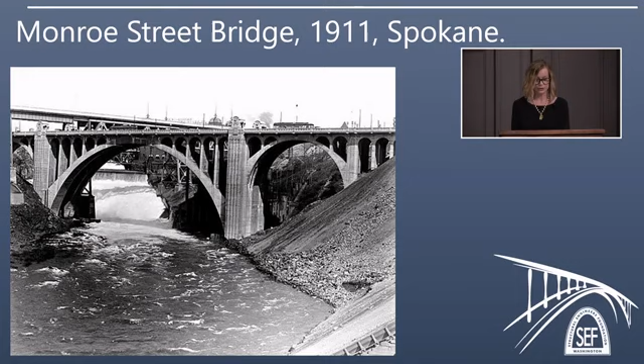And it's probably the reason that we had earlier concrete bridges here is that Washington doesn't have a big steel tradition, but we did have a thriving Portland cement industry. So we did have an early bridge, and that bridge is a historic bridge. It has been completely rebuilt in 2005, but retains the original arch span.

Now, another type of bridge, those two were both high fixed bridges, but we of course have movable bridges, drawbridges, and bascule bridges are the most common type. They are named bascule for the French word for teeter-totter, and that refers to the way that the movable spans are raised and lowered on counterweights. And if you've ever driven in a city over a river, you've probably driven over a bascule bridge.

Now, Seattle had a lot of desirable qualities as a place to build a city, but as I mentioned with the regrades, they had a lot of ambitious major engineering projects to do. And this South Lake Union area, that's where Amazon and tech companies are today. At this time, that was David Denny's lumber mill.

And back as early as the 1850s, one of the major engineering projects that they wanted to do was to cut a canal that would link Lake Washington at the east to Puget Sound to the west, and connect them by way of Lake Union in the middle.

And that is why it's called Lake Union, because it was going to be what united these two waterways. It got going in fits and starts by private investors, David Denny being one of them. Eventually the federal government took over the project, and this is how far the creek had been dug between Lake Union and Salmon Bay at the time the government got involved.

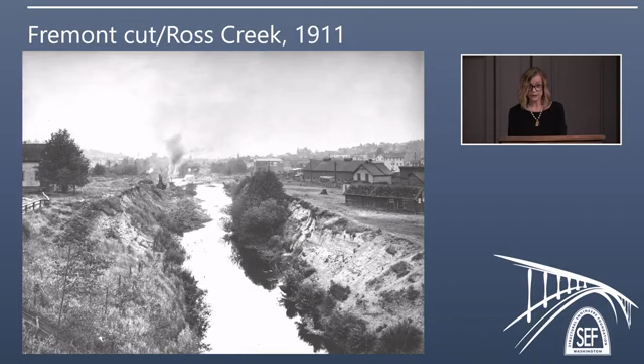They undertook the project, which included 2 waterway cuts, one at Montlake between Lake Washington and Lake Union, and another at Fremont. The city was responsible for 4 bridges. The Corps of Engineers were also building the locks and spillway, but the 4 bridges were up to the city to finance and build.

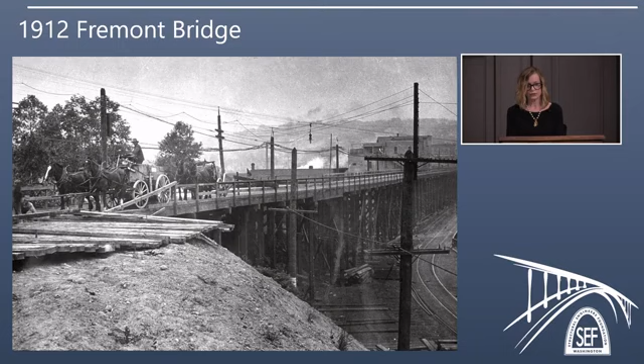The first, Fremont, there had been a bridge at this site since the 1890s that spanned the natural creek we just saw a photo of, which was the natural outlet of Lake Union. This bridge was built - this is actually the second bridge, not the 1890 bridge. This was built longer to accommodate the canal being dug.

In 1911, there was a temporary bridge built at Stoneway, which you could see in the distance beyond the bridge under construction here. It was temporary, but people got so used to using it, they wanted to keep it. They asked the federal government to permit another crossing there, but they said nope, so it had to go. Unfortunately, no crossing there.

So 9 months after the completion of the locks, the first bridge was finished, the Fremont Bridge. And then the Ballard Bridge is the next one. This is the Salmon Bay Bridge.

There had been a crossing at this same spot at 14th Avenue West since the 1890s. This one was built in 1910, temporary, with a swing span to allow for the construction of the locks. There is still evidence of this bridge. If you're familiar with Seattle, if you drive around Ballard, you'll see on 14th Avenue West where it's wider and there's a gravel parking strip down the center. That's where this bridge came out and that carried the train tracks. So that's why it's like that.

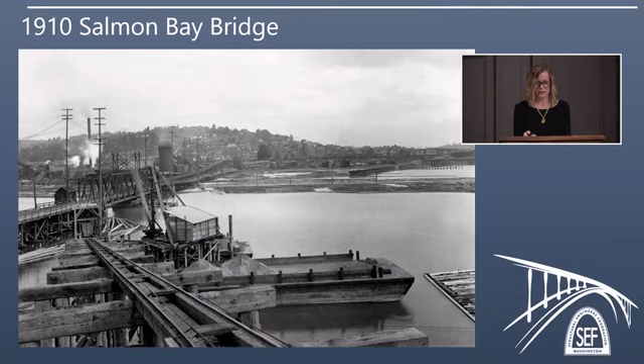Progress. However, for the University Bridge, there was a 2-year delay before it would be done. Part of that was controversy over the location.

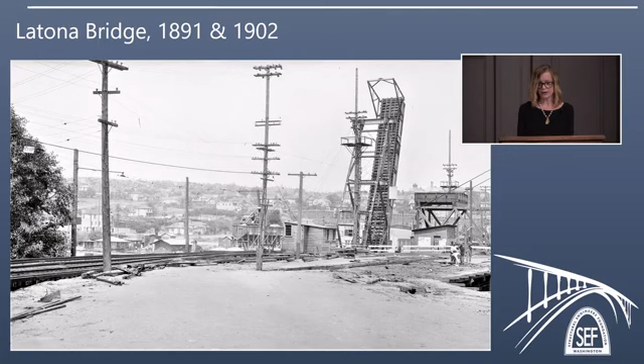This originally replaced the Latona Bridge, which was at 6th Avenue Northeast, and that served an area called Brooklyn, which we now just call the University District, and the University of Washington to the east. People wanted a bridge that would get them closer to the university. So funding was rejected until they decided on a site at 10th Avenue Northeast, which is where the University Bridge opened in 1919, but that was a costly delay.

They had to renegotiate contracts at wartime prices during World War I. So this bridge came in at $825,000, which was more than what the first 2 bridges cost combined. So it was a costly delay.

And all of the bridges had creosote timber on the decking, which became rather slippery when wet, which is quite often in Seattle. This bridge was particularly dangerous. It averaged 6 deaths a year because of the slippery conditions. This grating completely eliminated any deaths due to those conditions, and it was put on all the rest of the bascules by the end of the 1930s.

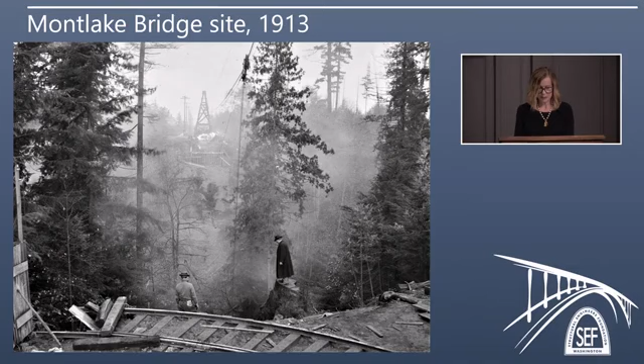It would be another 6 years before the 4th and final bascule bridge was built. Ironically, its foundation piers had been in place since 1914, because the Montlake Cut between Lake Washington and Lake Union cut Montlake Avenue, and they built the piers at the time. So people who wanted to cross at Montlake would have to take a 5 mile detour, taking one of the bridges to come back up. It was very inconvenient, and the area east of the university that it served was growing rapidly.

So why, in 1919 and 1920, did the citizens deny funding? Well, class resentment is probably the biggest reason, and that may sound cliche or intellectually lazy, but in 1919 the first citywide general strike in the nation was held in Seattle. So the tension between the working class and the moneyed class, and people who lived in these fine homes, was very real. And so they had to get creative.

The University Stadium had just been built in 1920, so bridge boosters teamed up with influential Husky fans and promoted it as the Montlake Stadium Bridge. It didn't pass, and a couple more times didn't work either, but finally on the 8th try, with momentum building for this stadium bridge, it passed in 1924.

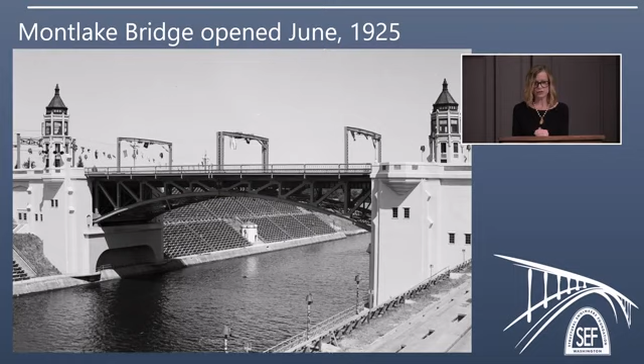And with the completion of that bridge came the completion of a long dream to build the Lake Washington Ship Canal. And John will now talk about bascules.

Thank you, Maureen. That's a fascinating description of how we tried to cross that waterway from Lake Washington down to the lock, to Lake Union, because clearly that's a big impediment and you need bridges to get over it. I'd like to turn the page a little bit and look inside some of these bascule bridges, and just see how they're built and how they work and what's important to them.

There's a few things which are relevant. One is that they've got lots of moving parts, so in some sense they're like a machine rather than just a fixed bridge. The spans you can use are also fairly limited by the machinery you put inside to lift and lower them. As Maureen pointed out, you do need to balance the weight, with a counterweight at the back and the span in the front. And of course, the lighter you can make the whole thing, the better off you are, because then the less energy you need to use in all the machinery.

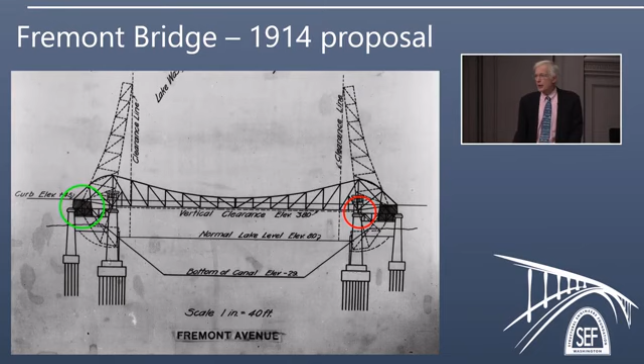This is a picture of the original Fremont Bridge proposal, and you can see it in both the up position and the down position. A couple things to point out: where the red circle is, that's the pivot point — essentially the balance point of the teeter-totter as it goes up and down. Another is the counterweight, shown by the green circle on the left. You can see that the backspan, the distance from the counterweight to the pivot point, is really quite short. You don't have much choice in that, because that point has to go down underground, and if you made it really long, you'd have to dig an enormous hole to accommodate it. So with a short backspan, you need a heavy weight on the back, and those weights are actually pretty big.

If we go to the Fremont Bridge and look at it as built, we can see some of those same features. There's a line there saying axis of rotation, which indicates where the pivot point is that it swings up and down on. You can't really see it from here because it's hidden behind the concrete sidewall, but that's where it is. And on the front, we've got these two steel supports where the bridge comes down and sits on the concrete, so that when it's in the down position, the weight is supported on the front, which stops the whole thing from tipping over forwards into the water.

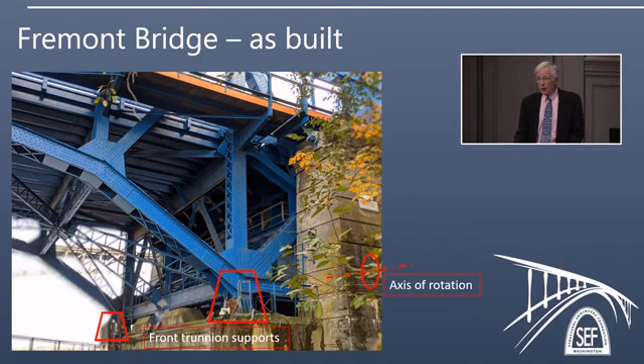How do they make them? Well, there was a fairly thriving shipbuilding industry in Seattle at the time, and to build ships you need big machinery, and that, I suspect, is part of the reason why we are able to produce these very large machine parts. You can't readily see inside, but if you drive over the bridge, you can still see the drive track. If you walk across on the pedestrian side, on the west side, you can see these big greasy drive tracks there, and they are indeed the working guts of the bridge.

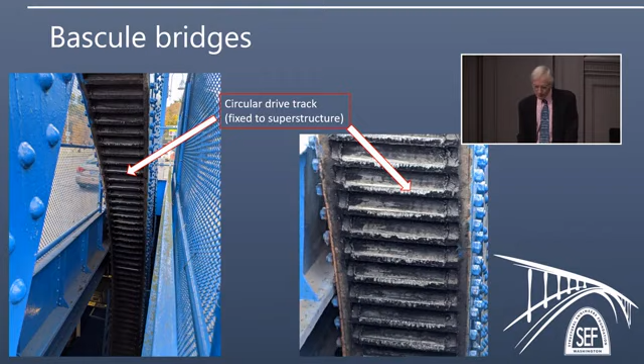I think we should take a look at the steel bridge construction in the Bascule era and just see how they made these things. And some of the important technology, when you make a bridge, is that you have to make it in pieces. You cannot just make a whole bridge and drop it in place suddenly. If you make it in pieces, you have to connect them together. And the way you connected them together at the time was using things called gusset plates and rivets, and we'll see those here.

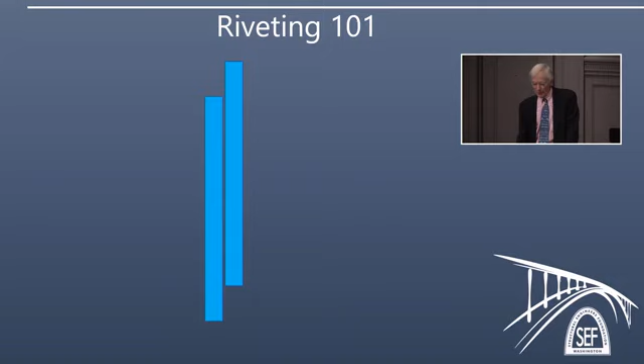If you've got two plates, maybe two gusset plates, that are sitting next to each other and you want to connect them, the first thing you do is drill a hole. Then you heat up a rivet to red heat, cherry heat, and then you put it in the hole. Then you bring up a riveting tool, which is a thing like a big heavy hammer which sits behind it on the head side. You bring up another riveting tool on the opposite side, and then you whack it so that you form a second head on the rivet when it's still hot. At that point, you're sort of done.

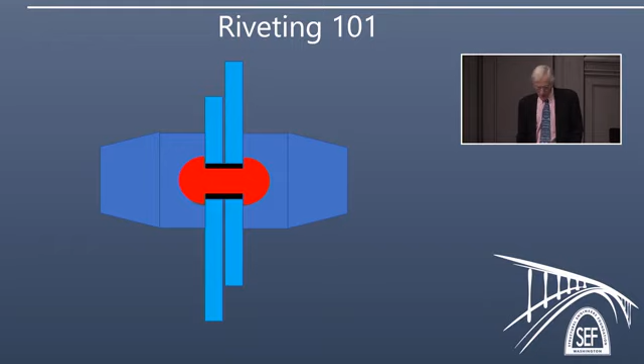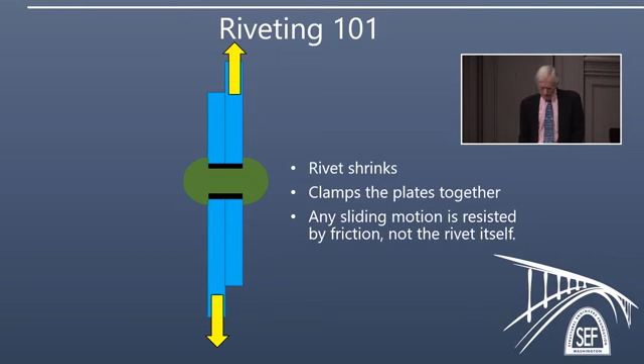I think it would be useful to look and see how it's done in practice. So there's a couple of pictures here I took from Peter Stackpole's wonderful book about building the San Francisco Bay Bridge, and these images are from him.

This is another picture just to give you an idea of how dangerous this work was. In the previous picture, you could see they didn't wear any form of ear protection, and riveting was a very, very noisy business. Up here, you can also see they are riveting on the very top of one of the towers of that San Francisco Bay Bridge, because the big piece of metal on the left is a cable saddle where the big suspension cables are going to go over.

You can see there's another gas burner up there smoking away. You don't see a single safety line anywhere. And these guys are something like 300 feet above the water. So tragically, it's not surprising that several people died on most of these big bridges.

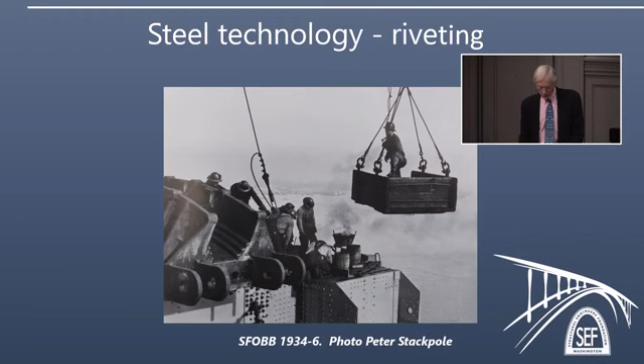And the answer is, if you don't have a pin, if the soil were to move, then you'd induce some stresses in the steel that you probably don't want. If you put the pin in there, then it allows the steel to move and you don't get any stresses in it. So it's a great way of dealing with either temperature effects or potential soil movement.

So how have things changed today? Well, back then we did riveting. Riveting took something like a 4 or a 5-man team to put in each individual rivet. And that in today's terms is incredibly expensive in terms of labor.

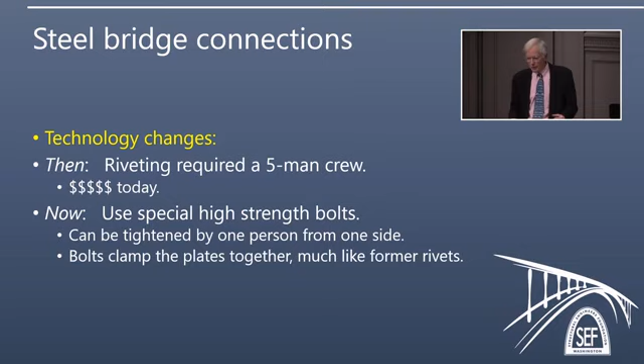So since then, what we've done is switched over to very high strength bolts, which do the same kind of job as the rivets. They clamp the plates together in a very similar way, but in today's world, there are now bolting systems that you can put the bolt in and tighten it up just from one side. You may wonder if you've got a nut and a bolt head, how do you do that? But that's another story that we won't go into today.

Well, if we think about the kind of overall steel bridge design and not just the connections, then there's a few things that stand out. If you're making steel bridges, steel is pretty strong stuff. Therefore, you don't really need very much of it. If you don't need much of it, then the members get to be quite small and skinny. And if you make them quite small and skinny, then immediately you bump into the problem of buckling. So what we find in steel structures is that two of the big problems are, number one, buckling, and number two, the connections. How do you connect the pieces together?

Second thing is, because it's so strong, you really need to put the material only where you need it. And that's why we wind up with configurations like trusses, which seem to have an awful lot of air in them, which is quite true. But you put the steel just exactly where you need it and nowhere else, and that's how you get that configuration. And the last thing is, how do you put these things together?

Well, back then, they put them together in what we would call a stick-built fashion. You bring each individual piece and you rivet it together. Today, it's a more common practice to weld together bigger pieces, to take those bigger pieces out to the site and then to bolt them together. Because welding is well suited to work in a well-controlled shop where you've got good weather. Bolting is better in the outside world where welding is pretty expensive, and particularly crane time is expensive. You don't want to have a crane holding onto a piece for a whole day while you weld it together.

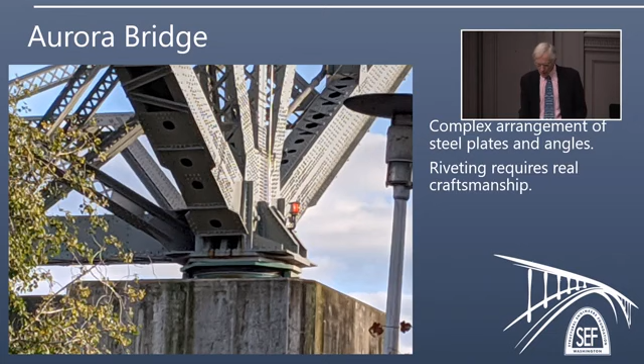There's one more thing here. I'm sure some of you have seen down the bottom, there's some more modern-looking green plates. These are seismic isolation bearings, which were put in in 2011. What they do is allow the bridge to move around a little bit on the support. The bearing is kind of like a saucer-shaped cooking pot with Teflon on the inside. It allows the foot of the bridge to slide around inside that giant saucer-shaped cooking pot so that it can displace a bit, and that massively reduces the forces on the bridge due to earthquakes.

I think you can imagine that putting that thing in retroactively meant that somehow you had to pick up the bridge with one hand and then put the bearing under with the other hand and then quietly let the bridge down on it when you were all finished. So just from a construction point of view, that was a remarkable operation.

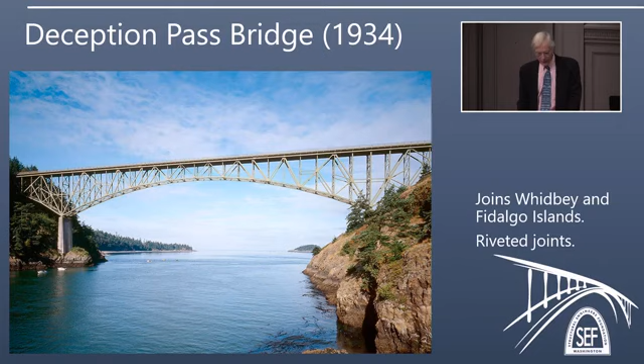A couple of other bridges here. Deception Pass, the same kind of era in the 1930s, again built by the cantilever method. And this is a particularly difficult one because the currents under that bridge are wicked as the water flows in and out due to the tides. So if you fell off that bridge, then it was probably a bad outcome.

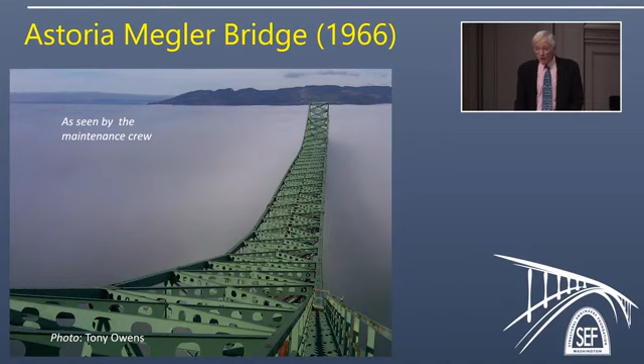So what do you do if you want to make an even longer bridge over water? Well, I think we'll hand over to Maureen to answer that question.

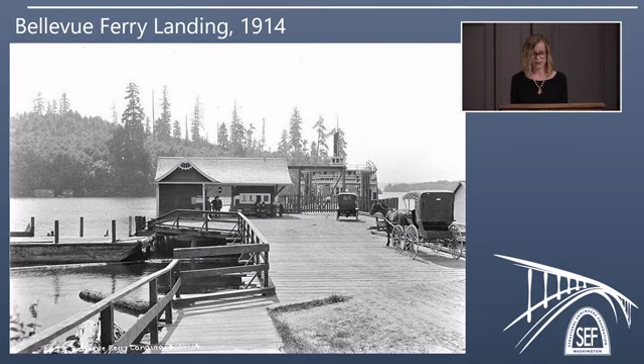And here is a horseless carriage followed by a horse and carriage waiting to get on the Bellevue ferry. If you did have a car, you could drive to Seattle, but you had to take a 26-mile, 1-hour trip around the south end of the lake and back up north to the city. There was no vehicle access to Mercer Island. And the area of Bellevue and Mercer Island were very, very rural.

After World War I, Mercer Island was considered a prospect for residential development if only you could get a car there. So they built the East Channel Bridge connecting the northeast side of the island to Bellevue. This is the same area where the I-90 connects today. This did increase the residential population a bit in the 1920s, and there was some interest among islanders for a bridge across the lake to Seattle.

But it was problematic. The lake's very deep, muddy bottom, so a traditional bridge on piers is problematic, and there just wasn't enough interest.

This gentleman, Homer Hadley, though, he was way ahead of them. He first proposed the idea in the 1920s. He was an engineer who had experience building concrete ships and barges in Philadelphia during World War I. So he was very keenly aware and interested in the floating possibilities of concrete.

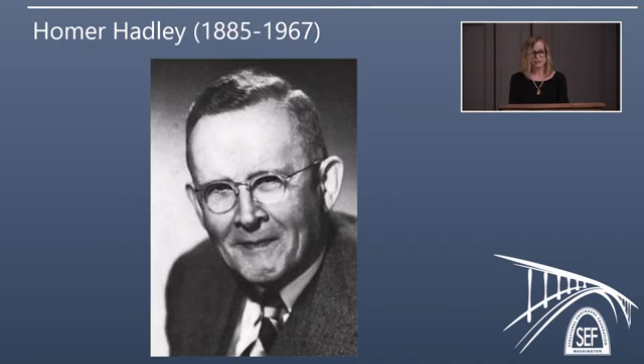The WPA offer was set to expire by the end of 1938. They proposed a tunnel through Mount Baker, but people didn't want it. There was a NIMBY problem, and debate over the location. The federal government said, enough already, build it, or we're going to revoke funding. So they broke ground two days before the end of 1938, just in time.

But Murrow asked Hadley to stay out of the public limelight of the bridge because of the Portland Cement Association, which would see it as a conflict of interest. He said, you'll get credit later after it's built, just keep quiet for now.

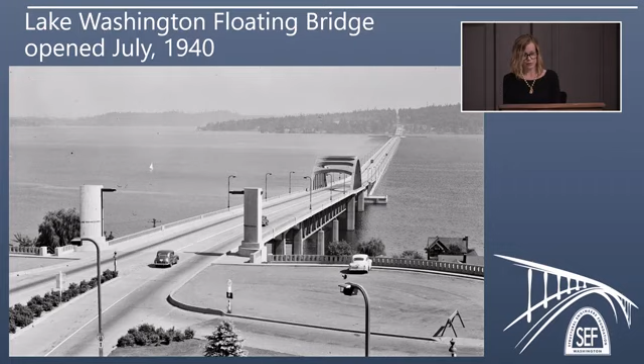It opened in July 1940. Its floating span was 6,620 feet. It was the longest floating structure in the world when built, and the first floating bridge made of reinforced concrete. It cut travel time from one hour to seven minutes from the east side to Seattle.

It was a resounding success. The bridge became an attraction in itself. People would come just to drive over the bridge, but it also sparked a massive amount of growth on the east side, particularly after the war. Between 1940 and 1950, the population and property value at Mercer Island increased 300%.

The growth was really concentrated in Bellevue and Mercer Island. By 1948, Kirkland, further north, wanted another floating bridge to serve their community. But it would be another 15 years before it was built.

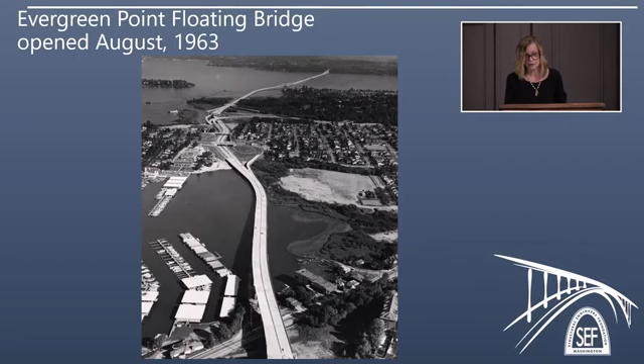It did deliver the growth they had hoped for. It paid its toll off even sooner than expected, 21 years early. It was supposed to be paid off by 2000, but it was paid off by 1979. But the traffic relief it was supposed to have created was totally erased by the population growth.

So in 1989, a third floating bridge was constructed directly adjacent to the first one.

After that third bridge was in place, they went about refurbishing the original bridge at 50 years old. They were refurbishing the pontoons and left these pontoon hatches open over a Thanksgiving weekend in 1990, and it happened to be a very blustery one. A storm came in, and those open hatches got filled with water. Workers attempted to pump the water out, but it was too late. One pontoon sunk, and then they all went down like dominoes.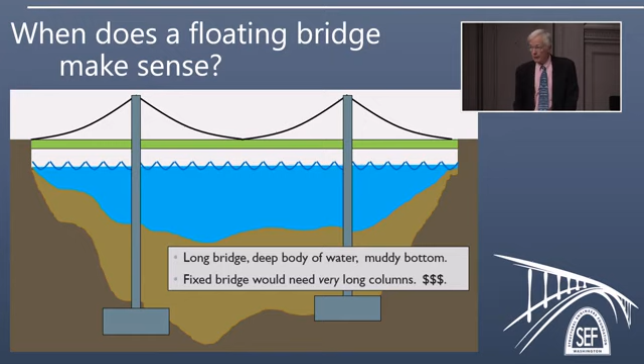You might be suspicious and say, I don't think concrete floats. Do these things really float properly? Well, if you put enough air inside it, you can make anything float, and that's exactly the principle used with concrete pontoons. We use it for ships too. Steel ships have been around since the middle of the 19th century, and they float, even though steel's heavier than concrete. So why make it out of concrete rather than steel like a ship? Basically because the concrete solution is cheaper.

We've also had significant experience with these things. Homer Hadley himself was doing it during the World War I era. A good reason for making ships out of concrete then was that they were non-magnetic, and people were running around with magnetic mines, clamping them onto steel ships and blowing them up. Of course, you can't do that with a concrete one.

We make things like LNG, liquefied natural gas barges - giant floating platforms. Docks the same. And even the UW-ASCE has a concrete canoe team, making concrete canoes which they paddle and race. Those things are incredibly light and thin.

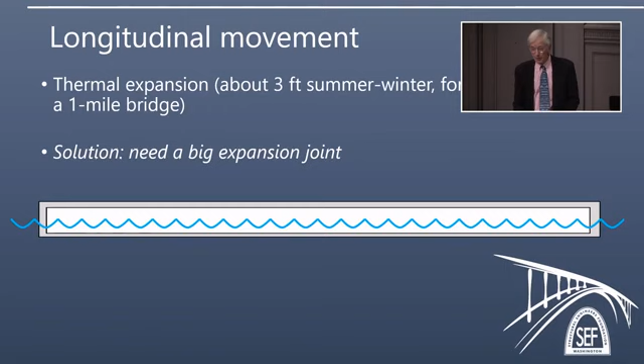Transversely, across it, what do we do there? The problem is that if you don't anchor it down properly, the bridge might blow away or be carried away by the tide or current. In Hood Canal it's tides, and in Lake Washington it's mostly winds. There are a couple of floating bridges in Norway, usually at the mouth of a fjord, where a river comes down, so in that case it would be the river current you have to anchor them against.

So we put in anchor cables, which are fairly flat, nearly horizontal. At the far end, there are a couple of different types of anchor you can use. One is what we call a gravity anchor - crudely, just a big bucket full of rocks, very big with a lot of rocks in it. That works nicely if it's sitting on competent soil. If the soil is very soft, the bucket of rocks would sink into the soil and move around. So typically there you'd use a blade anchor, more like the anchor of a ship - it cuts into the soil and then picks up a lot of weight of soil.

So this is a gravity anchor. This one's actually out at the Hood Canal, and you can see this is the bucket, and they're just dropping it between two giant barges and a big gantry crane, just dropping it into the water where they want to, and then they drop the rocks in later.

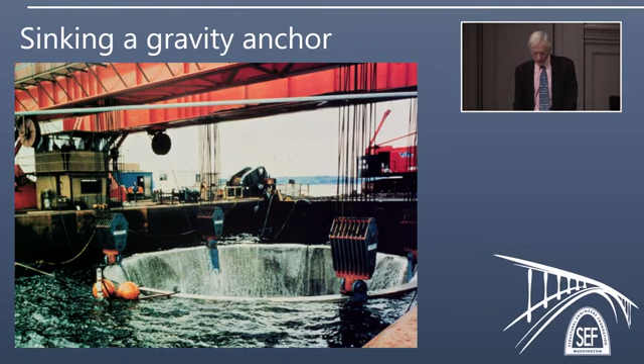This is a blade anchor being constructed, and you can see there's a steel triangular shaped thing which is a clevis with a little hole at the front end, which is where the cable will be attached using a shackle. At the back end, it looks like there's a wall going to be constructed of reinforced concrete because you can see the rebars there. That is the flat part of the blade, which will engage a lot of soil, so when you pull on the anchor, it won't go anywhere.

At the other end of the anchor, inside the pontoon, you need to fix it there, but you also need to make some space for adjustment. So what you have here is a long red track, and there's a movable dolly in the middle of it, with the end of the cable attached to that dolly by a clevis. If you want to move it, you undo the bolts which are holding the dolly to the track, put a big jack in behind it, pump up the jack, move it to where you want it, and put bolts in the new place.

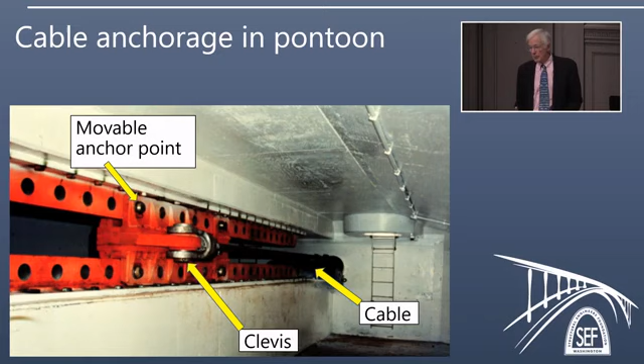In that way, you can adjust the length of the cable and the tightness of the cable. And the last movement you might be worried about is vertical. How do we deal with that if you've got these anchor cables there? Surely they would hold the bridge down and sink it if the tide moved up too far.

If we look at the vertical change in water level, in the lake it's not too bad, it's around about 2 feet, and this is adjusted by the Corps of Engineers by messing with the lock height. In Hood Canal, the tide is something like 12 feet from top to bottom, so that's a much more serious problem.

But in both cases, what you can do is if the tide goes up, if you make the anchor cables flat enough, then the change in length of the anchor cable is actually very small as the tide goes up or the current goes up.

So what happens to these bridges? Well, unfortunately, we've lost 2. When I came to the state of Washington, there were 3 floating bridges here, and since I've been here, 2 of them have sunk. I assure you those 2 events are not related, I had nothing to do with their sinking. The Lacey V. Murrow Bridge went down, as Angela pointed out, as Maureen pointed out, in a big storm on Thanksgiving Day. There was actually a perfect storm of events that happened then.

As they were trying to retrofit the bridge, they were cutting some of the deck off using hydrodemolition, where you use very high pressure water jets to cut the concrete. That meant the water was contaminated, so they were forced to store it somewhere and then pump it away later. So they were storing it in the bridge, because where better? It's a giant box which you can put stuff into. So they were putting it in the bridge and pumping it out every 3 days or whatever, and it happened to be fairly full at the time that the Thanksgiving weekend came up.

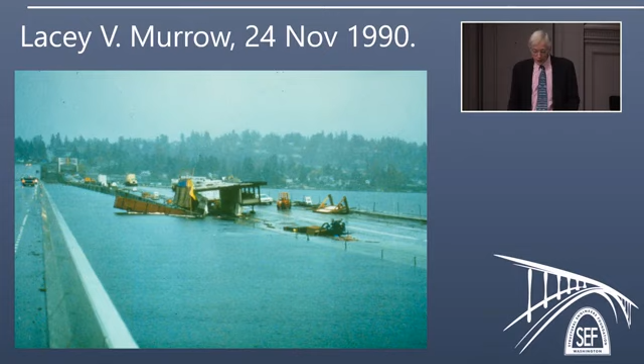In addition to that, the cable hatches were open on the side, and a giant storm came up over the Thanksgiving weekend when there were very few workers around to do anything about it. And so the rest is history.

The second bridge that went down was the Hood Canal. This went down in February 1979 in a particularly heavy storm. What happened there was that there were hatches on top of the pontoons for access so you could get inside to inspect them. Those hatch covers blew open as the water was washing over the pontoons, and as they blew open, the water got into the pontoons. You know what happens if you fill a concrete box with water when it's meant to be floating. So with this bridge too, we lost half of it.

Those are the kind of ordinary problems that you have to deal with if you own a floating bridge. There are some special problems which come up, which we can look at, just a couple of them now.

One of them is that in a floating bridge, it will move up and down with the water level. That means you've got to get from the fixed part of the bridge, which is on land, to the floating part, which is going up and down. This is exactly the same problem you have in a harbor when you have to get from ship to shore. You need a gangplank.

You'll get rotations at each end of the gangplank as the water level goes up and down. We can see that here as the water goes down, the gangplank has to rotate.

This is fine if you've got rubber-tired vehicles. They can deal with that little sharp kink at the end because it really is not that sharp. You don't even notice it as you drive across. However, if you have aspirations to put light rail over the floating bridge, then the picture changes because you have fixed rails, and rails do not like to go through these sharp angle changes. So you need some device in order to smooth out this sharp angle change into a gentle curve.

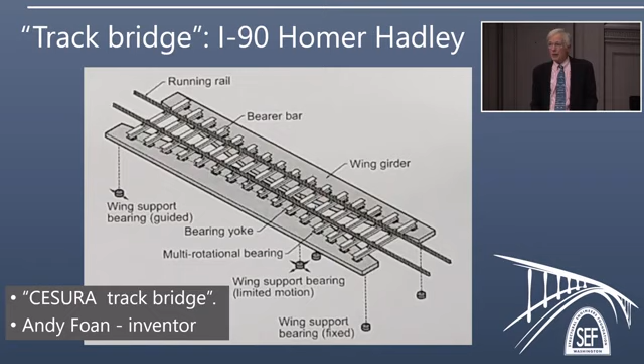The geometry is worked out in such a way that the vertical curve is exactly right, so the rails will be tangent to the slope of the rails on the other part at the end, and you get a smooth curve instead of a sharp rotation point. When you first look at it, it's mind-bogglingly complicated, and when you've seen it a few times, you think, my gosh, that's clever, because it's simple, and it really is.

This is the one they're installing right now on the I-90 floating bridge, and it's not a super good photograph, but you can see the cross pieces are the railroad ties or the bearer bars. You can see that they are slightly different lengths, and you can see that they're built on a curve, and the support bearings underneath them, and you see the rails on top of them.

As far as I know, this is the only one that has ever been built in the world, and so by definition, it's the first time this system has been used anywhere.

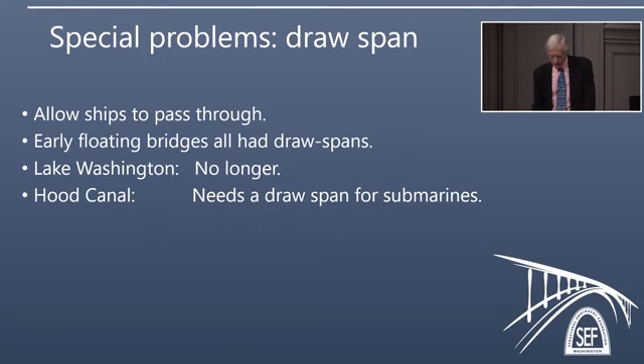Another problem you have when you own a floating bridge is that you probably need to let ships through, and this involves a draw span. And all of the early floating bridges had a draw span in them to let ships through. This is no longer true in Lake Washington, but the Hood Canal still maintains one, and we can take a look at a couple of them here.

Now this involved a somewhat awkward driveway, especially if you were drunk, because you'd be coming along going straight on the floating bridge, and suddenly you'd have to go through this rather sharp bend as you move from the original straight line out to a straight line that was 20, 30 feet further out. And so there was a certain danger to motorists here.

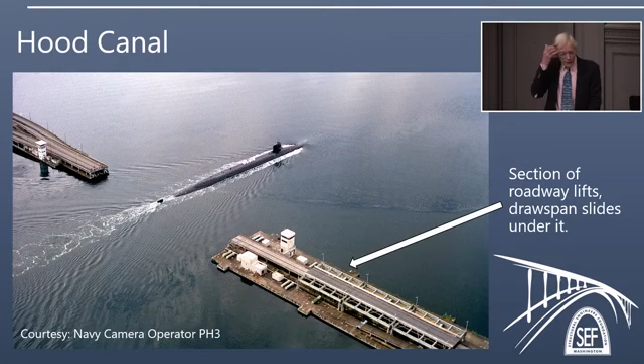What they've done there is, instead of having an opening where you simply float between two side pieces, they actually lift up the roadway on hydraulic jacks, and the part which is moving to make the opening slides underneath the part which has been lifted up. So it's kind of an over and under system rather than a side-by-side system.

So I think you now know everything about floating bridges, so we should move on and look at another different type of bridge, and that's pre-stressed concrete bridges. And these are very, very common in the state of Washington. They're actually common over the whole country now, and they're really the workhorse bridge for medium-span bridges in the kind of 75 to 225 foot range.

These pre-stressed girders seem to do a wonderful job because they're economical, they're very durable, you really don't need to do much to maintain them, and therefore they have very low life cycle costs. And this is the main reason why they've become so widely used across the country. They were started in 1952, and we're still using many of them today, and they pretty much started in the state of Washington.

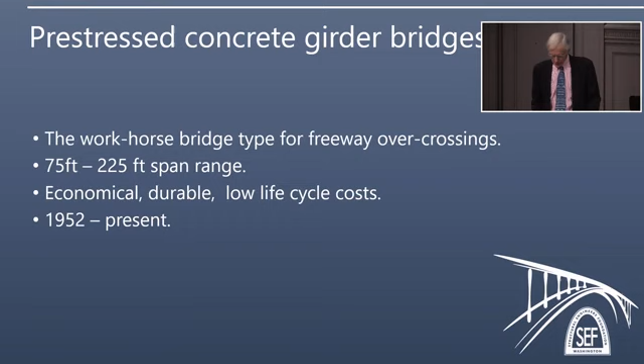For those of you wondering what pre-stressed concrete is, let's just try and put the course into 30 seconds here. If you have a regular reinforced concrete member, like a beam, and you load it with some gravity load, you drive a truck across it, then the beam will bend, and on the tension side, which is the bottom, the concrete will crack. Now, that is not remotely unsafe, because you have already put steel reinforcement in there to carry any tension forces, so from a safety point of view, it's just fine.

But on the other hand, when the concrete cracks, it does two things that you don't really want. One of them is that if the concrete cracks, the member becomes a lot more flexible and the deflections become bigger, and that may become a problem. The second is that with cracks, water and de-icing salts and other nasty chemicals might get into the cracks and eventually corrode the steel, and that would be a safety problem.

So what you can do is pre-stress it. And what you do is you put a cable through the concrete, and then you put a jack on it, and you pump up the jack, and you put a big stress in that cable. You then come along and put an anchor at the end where the jack was, and then you can throw the jack away. And what you're left with is some concrete which is pre-compressed by having this tension cable through it.

If you imagine, it's a little bit like having a bunch of kids' blocks with a rubber band which is stretched tightly around them. They're squeezed together and the rubber band is in tension, and so far you've got no load on it. Now the good thing about this is that it delays the onset of cracking very significantly, and that massively changes the performance of the material. And again, it's one of these ideas like Andy Foan's CESURA. It's really clever because it's really simple.

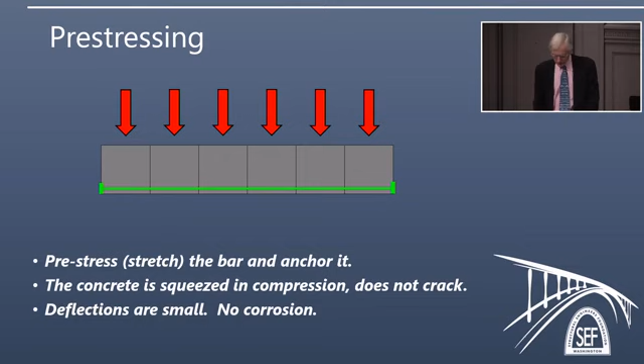Now, like all these people, Art was, I think the way to describe him is a highly intelligent, visionary knucklehead, because he was the kind of person who, if you wanted him to do something, all he had to do was say, Art, you know, I don't think this could be done. And he'd kind of grit his teeth and he'd go off and he'd do it. Whether you thought it was possible or not, he would make it happen. He was that kind of a guy.

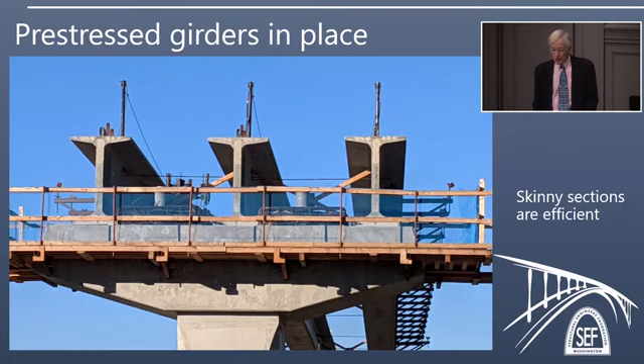What they then do is they put the form together around these cables, cast the concrete. When the concrete has set up and hardened, they let go with the jacks. The cables try to shorten, but because they are now bonded to the concrete, which surrounds them, they can only shorten a very small amount, and the whole thing comes to equilibrium with the concrete in a lot of compression and the cables still with a lot of tension in them.

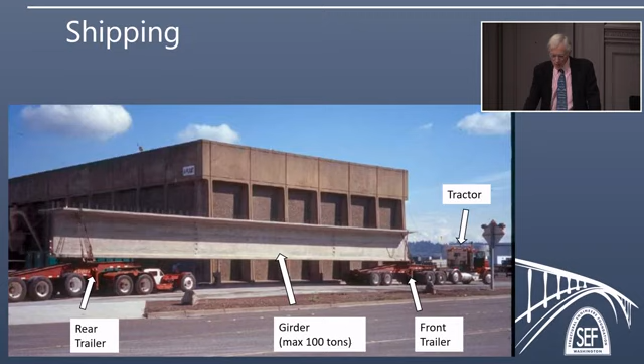And each of those trailers has a lot of wheels anyway, just because the weight is so big that you have to spread the weight over an awful lot of tires so that you don't overload any of the roadways or bridges that you're crossing. And then the girder simply spans between the front and the rear trailer, carrying its own weight, because it's perfectly capable of doing that. You put a tractor on the front and off you go.

But there's one more thing here. In the back, you may or may not have noticed, at the front of the rear trailer, there's a little cab, and you can just see it's got a kind of a white part on the cab there. This is necessary because you need to steer that rear trailer. So someone sits in that cab. They don't have any power available. That all comes from the tractor in the front. But they sit in the trailer, and they have to steer that trailer.

And they are barreling along the highway at 60 miles an hour, and they've got a concrete girder weighing something like 100 tons about 2 feet above their head. And frankly, rather them than me, and I hope they get paid a lot of money for doing that, because it seems like a very dangerous and skillful job.

Then when you get to the site, you take them off the truck, off this trailer system, quite carefully, and then you simply erect them on the bridge. And in that sense, they're a bit like a steel girder, in that you can simply put it straight up there. You don't need any wet concrete there. You just put the girder straight up.

You do see some things that look like bits of orange rusty metal on the side. These are brackets which will hold the formwork, because on top of these girders, they will eventually cast a field cast concrete slab, because this is again the Sound Transit up at Northgate. They need a flat slab to put the rails on. So that's what will happen. That's what those brackets are for.

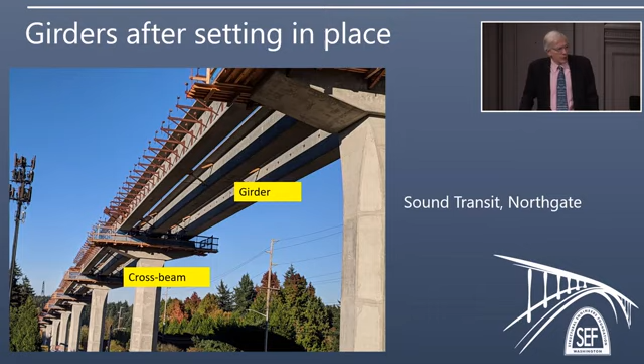So I think that's probably quite enough about prestressed concrete. And we should move on and talk about another type of bridge, which Maureen will introduce you to, which is the Pasco-Kennewick Bridge.

Pasco-Kennewick, yes, thank you, is two of the three cities that make up the area we call Tri-Cities, the third being Richland. Pasco and Kennewick are across the Columbia River from each other. Now, they are still largely farming communities, but Pasco got a Northern Pacific rail yard in the late 1880s, and that bridge you see back there is the Northern Pacific Railway Bridge.

But until 1922, the only way to get people or automobiles across was by a 6-car capacity ferry. Getting a lot of people across was very difficult. In fact, the Pasco-Kennewick football teams, when they'd have their big rivalry game, the visiting team would charter a train to get everybody across.

In 1922, they built the first Pasco-Kennewick Bridge, called the Green Bridge. It is a 2-lane steel truss cantilever bridge. And this was a cooperative effort between the two counties that the two cities are located in. And it was funded by communities all over the state because it was a really important major crossing in the early highway system of the state. It closed the gap in State Route 397, which was also known as the Inland Empire Highway.

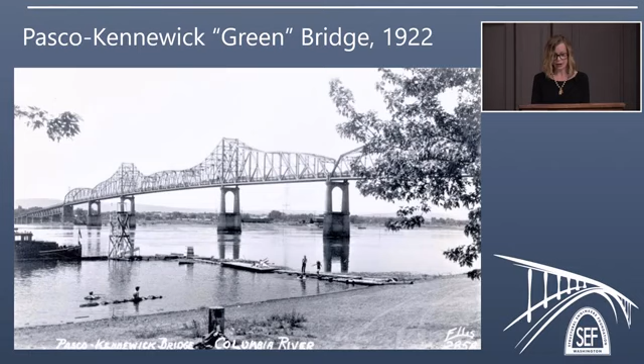You can see here it crosses where the ferry route was, and in fact there is a grounded ferry over there on the side, on the right. And it served both communities very well, until about 1940, when the construction for McNary Dam and the Hanford Nuclear Facility really started creating a population boom and a traffic boom, and the old 2-lane bridge became very congested and dangerous. They'd even treat it as a one-way bridge at times because it was so narrow. They'd let a car pass and then another car pass, and so it could be quite a mess.

So in 1954, it was time to bust out the novelty scissors again for the opening of the second Pasco-Kennewick Bridge. It was built about a mile upriver, and it connected U.S. Highway 395. It did, however, divert traffic away from the city centers of Pasco and Kennewick.

The Pioneer Memorial Bridge, which is nicknamed the Blue Bridge for the color of its steel through truss there, is a 4-lane arch truss bridge. It was the first steel tied arch design in the state. And it definitely improved conditions for driving, but it did decrease traffic into the cities of Pasco and Kennewick.

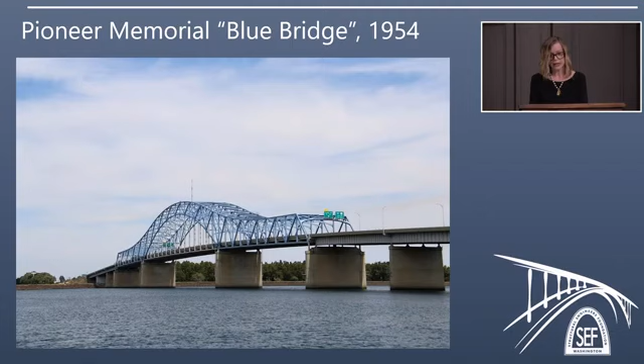So a gentleman named Ed Hendler, who would later become mayor, was actively trying to get the old bridge, the green bridge, fixed up, or even have another bridge built next to it, to try to bring people back into their community. However, there was just no funding to be found for it.

And then in 1967, the Silver Bridge collapsed over the Ohio River, killing 46 people. And the federal government started the National Bridge Replacement Program. So the federal government would pay for 75% for a new bridge.

And Hendler, as I mentioned, wanted to do a second 2-lane bridge next to the 1922 bridge. But the Army Corps of Engineers said that its 13 piers in the water were too much of a hindrance for navigation. They wanted a 4-lane bridge with only 2 piers in the center lane of navigational traffic.

So then came this gentleman, Arvid Grant. He was a Latvian-born engineer who came to the United States and settled in Olympia in 1951. He had experience in Europe with post-war cable-stayed bridge construction, which was used to replace bombed-out bridges, and he wanted to bring this technology to the United States. This was the opportunity of a lifetime to cross a mighty river like the Columbia, as he put it, a once-in-a-lifetime dream for an engineer. His proposal fit the requirements of the Corps of Engineers, and its cost was comparable to other more traditional United States solutions to long-span bridges.

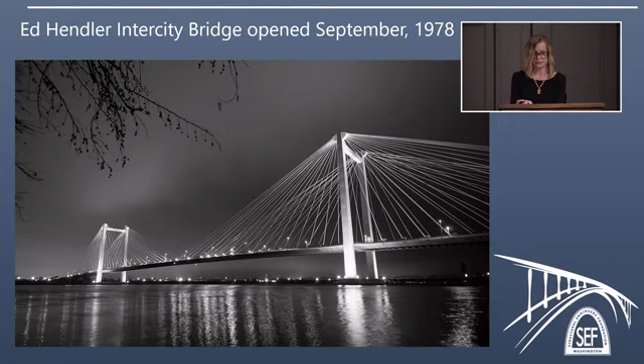And to explain how they work, I'll hand it over to John.

Well, thank you, Maureen. It's a very handsome bridge. If we take a very quick jog back into history, the idea of a cable-stayed bridge is not new. A gentleman called Fausto Veranzio built one in Venice, but clearly not out of high-strength steel cables, way back in the 16th century. A few were built at different times in different variations during the 18th, 19th, and early 20th century, but they really got a boost, as Maureen was pointing out, after World War II.

There were three conditions that came together at that time. One was that pretty much all the bridges over the River Rhine had been bombed out by the Allies during World War II, so they desperately needed bridges rebuilt. The second was that there wasn't much steel around because it had all been used in the war effort. And the third was that there were a lot of ex-Luftwaffe engineers who no longer had jobs because the Luftwaffe had been disbanded by the Allies.

So what you had was people with slick engineering skills and a real need for bridges, but very little material. So what do you do? You make a bridge which uses very little material and solves the problem. And that's exactly what happened. The two big movers and shakers here were a gentleman called Franz Dischinger and Fritz Leonhardt, the Franz and Fritz of the German bridge builders of the time. They were the ones who really developed the system in Germany shortly after the war. And as Maureen pointed out, it was Arvid Grant who brought it to this country for the first one in 1978.

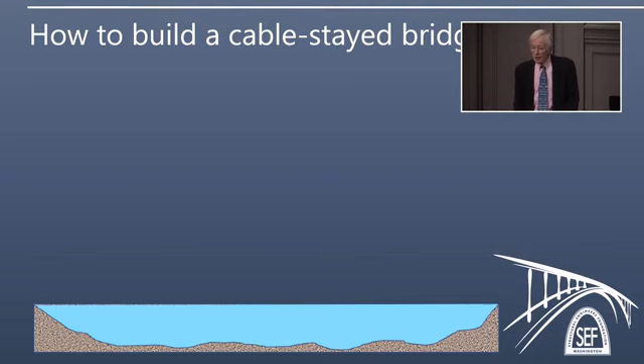So you start with the Columbia River, and you come and put a column down in it, or two as the case may be. You then put a cable down, and then you build a short piece of deck. You can either build it prefabricated and float it in on a barge, which is a common way of doing it, or you can do something else. Then you do the same on the other side, and you balance the weight on the column. Then you do the same on the first side, and the same on the second side, and you get bored of doing it individually, and you put them all up. So basically, you're putting a cable and a section of deck in, one after the other.

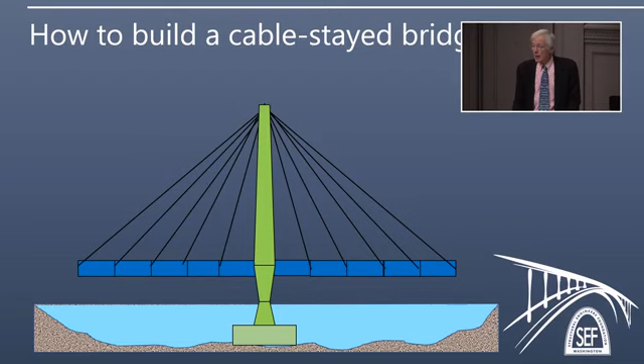You may be familiar with the Port Mann Bridge, just behind Vancouver, BC. That was built in exactly this way. It's one of the bigger ones.

What do the forces look like? It's a fairly simple arrangement. You have tension in the cables, not surprisingly. You have vertical compression in the tower, since that's the way all the weight is eventually coming down. What you get, which you don't particularly want, is a lot of compression in the deck. This is kind of the price you pay for having the tension in the cables.

The deck is typically made as light as you can make it, because you don't want to have cables heavier than you have to. Today a deck is often supported on steel beams, or in this case trusses which go transversely across it, with a concrete deck cast on top. This is done to make the pieces modular, so you can bring them in on a barge — say 20 or 25 feet of deck in a big piece — lift it up on a crane from the barge, anchor it to a cable, and go off to get the next piece.

The bad news is that you have compression in the deck, and this actually gets bigger the closer you get to the tower, because all the horizontal components of the cable forces are adding up. By the time you get back to the tower, there are some quite big horizontal forces in the deck. We're trying to make the deck light and as skimpy as possible so it doesn't weigh too much, so you have to be careful about buckling and material failure questions — that's just one of the things you deal with when you design a cable-stayed bridge.

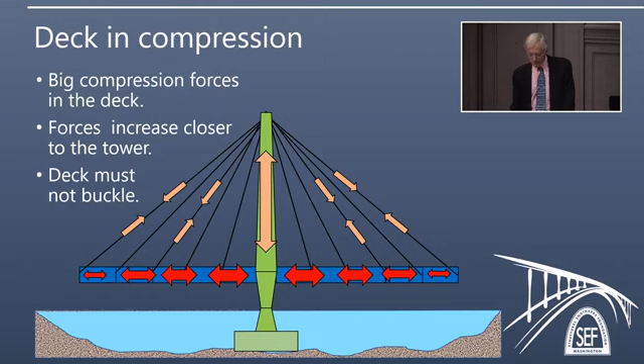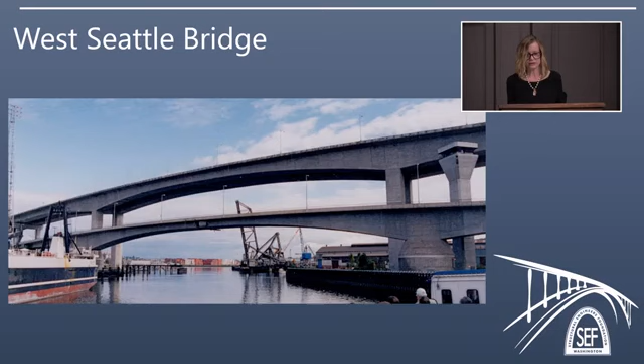Yes, the infamous West Seattle Bridge. There it is, and the Spokane Street Swing Bridge below it.

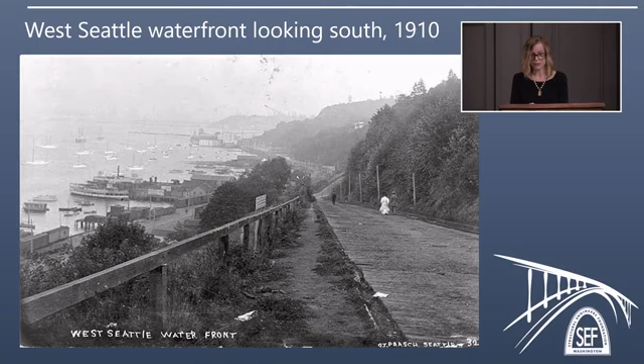Access was by steamer and ferry service until 1902, when the first low swing bridge was built at Spokane Street. A couple of years after annexation, the city built a new Spokane Street swing bridge.

Part of the main reason West Seattle voted to be annexed by Seattle was infrastructure concern — they wanted electricity and water. To save on cost, the city used pipes you can see on either side of the bridge to carry the water supply to West Seattle. Every time a boat came along and the bridge had to open, they would turn off the water supply and uncouple the pipes, so people in West Seattle couldn't turn on their water. It was a considerable nuisance that got worse as traffic and boat traffic increased.

By 1916, the community was calling for a high fixed bridge that would deliver residents and commuters up to the bluff where their homes were. But instead, in 1918, the city built a second, slightly higher bridge to be there on a temporary basis, just until they figured out what replacement they were going to put there.

This and the 1911 bridge handled the traffic pretty well. And in 1921, ferry service stopped. Growth was continuing, and traffic got very, very bad, so the calls for a high bridge were really reaching a fever pitch.

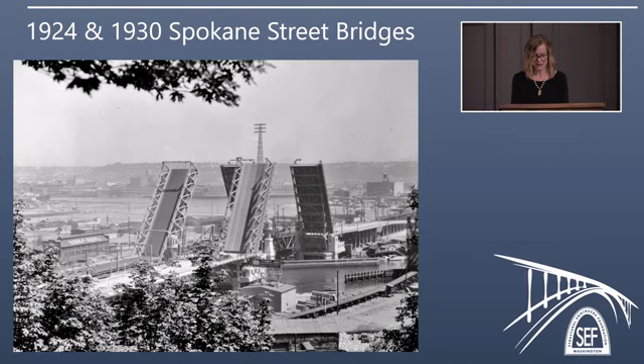Then an inebriated 80-year-old freighter pilot rammed into the north span with a freighter carrying 20,000 tons of gypsum, damaging it beyond repair. It was stuck in the open position, and because it was not fixable, it qualified for federal funding. So West Seattle was finally going to get its high bridge after over 60 years of asking for it.

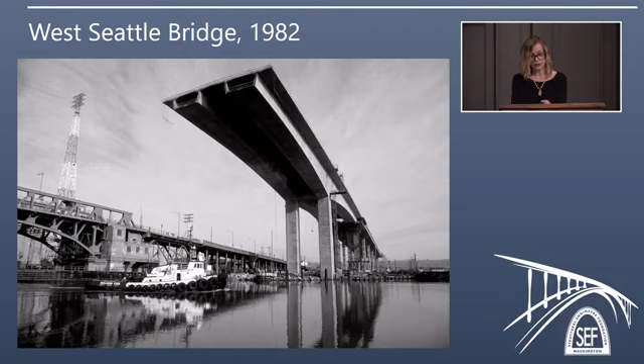So in 1980, construction began on a cantilevered segmental bridge. The 1924 bascule bridge was left in place and served the community while this bridge was under construction. A replacement for that lower bridge was part of the funding package, and that was completed in 1991.

So here they are together: the high bridge handles the commuter traffic, and the low bridge handles the industrial and port traffic. The low bridge is actually a pretty innovative bridge as well — it's the only concrete swing span in the world and the world's heaviest moving structure, and it was awarded an outstanding achievement by the Society of Civil Engineers.

But you have heard lately about the bridge giving us a bit of trouble, so I will hand it over to John to discuss that. Thank you, Maureen. I don't like to be the one who has to deal with trouble, but there we are. Let's go back to the good end of it.

When they were building the West Seattle Bridge, they were faced with the problem of building a bridge with a fairly long span — 590 feet for the main span, and about 375 each for the two side spans. They went with pre-stressed concrete construction. They actually had an option for steel or concrete, but the steel one came out to be quite a lot more expensive, so economics dominated and they built the concrete one.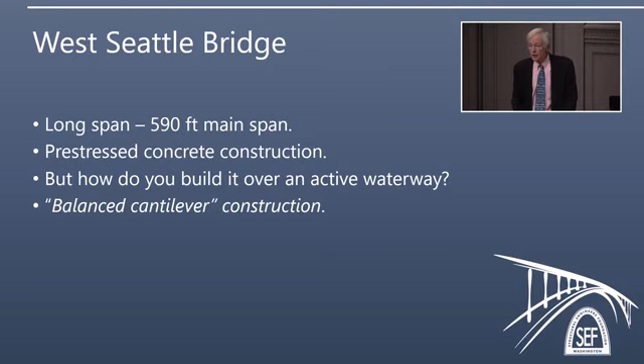Then again, the question is how do you build it over an open waterway when you cannot put false work down there? We're back to our old friend, cantilever construction — here it's called balanced cantilever construction, a slight variant on what you might otherwise have seen. It's a terrible name because at no stage is the construction actually balanced; it's always unbalanced, but we'll have to forgive the engineers for getting the wording wrong.

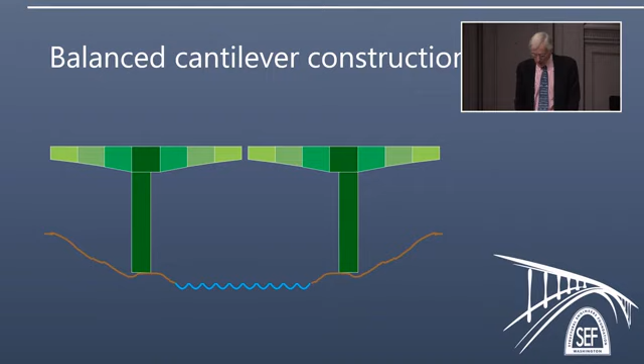What you do is build two big columns, about 12 feet by 17 feet square. Then you build a small portion of the deck structure, which is a big box, and push it out so it's a little bit eccentric — in this case, both pointing towards the middle. Then you build another one on the outside, making you about half a segment eccentric towards the outside, so now the columns are bending outwards. Then you put another on the inside, and now the columns are bending inwards. You keep putting pieces on the outside and the inside, always keeping the column very slightly unbalanced, because you really can't do anything else. Finally, you do what they call a closure pour in the middle, where you connect the two up.

Now, when you're building these things, you might ask, it's okay to show the pieces flying up in the air, but how do you stick them on? Well, the answer is you go back and do the same pre-stressing operation we saw before. When you put the piece on and you're holding it up with a crane, you put a cable through, anchor it at one end, put a jack on the other end, and pump up the jack tight to stress that cable. You come in and put an anchor on at the jack end, then drop the jack in the water and throw it away. What you're left with is all these pieces squeezed together by cables under high stress — again, think of the rubber band.

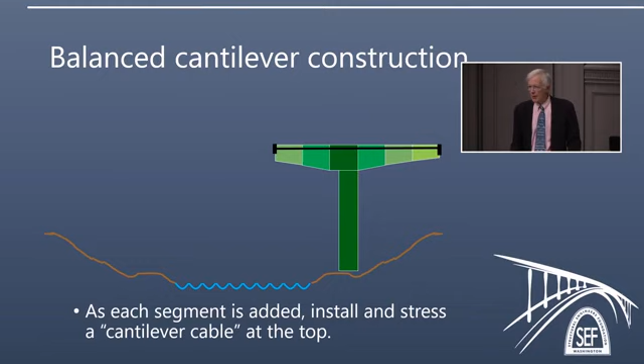You've got a super big rubber band on steroids, which is squeezing all of these pieces together, and that's how they manage to stay up. You do this on both sides.

In addition, when you've done the closure pour, you put additional cables in the bottom to take the weight when you drive trucks over this thing. So that's how you build a balanced cantilever bridge. You can actually do it two different ways: you can cast the pieces in place by putting a new form at the end, carried on a crane or false work, or you can ship them in on barges as prefabricated, precast pieces and lift them up with a crane.

Typically today, if you've got a big enough bridge and it's worth making a special casting yard, precast is probably the way to go because it's a little easier. But the West Seattle Bridge was built using cast-in-place technology.

Just a couple of drawings to show you what the drawings for these things look like. These are the drawings from the original bridge, and they're all hand-drawn. You can see the fairly elegant handwriting on there—these guys really took care with their handwriting.

This is the bridge in elevation. You see the big main span and the two side spans. The box thing in the middle is just a drawing showing the navigation clearance that was required by the Coast Guard.

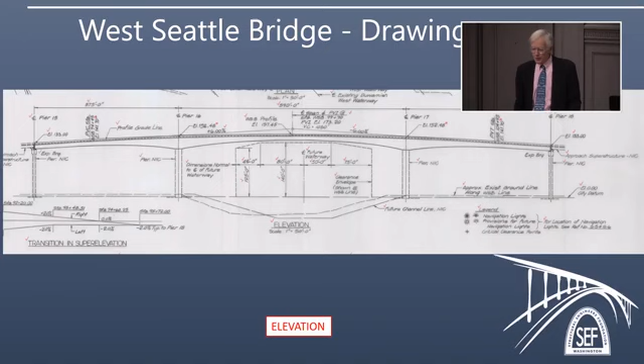If we look up close at some cross sections, you can see that the box is a lot deeper over the supports than it is at mid-span. That's reflected here: the deep one on the left is what it looks like back near the piers, and the shallow one on the right is what it looks like out at mid-span.

Back at the piers, it's got a very thick bottom slab, much more so than out at mid-span. That's because you've got much bigger bending moments when you're back at the piers.

Well, what about that post-tensioning or pre-stressing? Here it is—you can see what looks like a pepper pot in the top flange with a whole bunch of holes in it. These are the ducts which they pass the cables through, and you need an awful lot of ducts because it's made in an awful lot of pieces.

Each piece needs its own cable and its own anchorage when you lift it up or cast it, in order to anchor it back to the previous ones. Then you have to have a new anchor for the next piece and every other piece that comes in. So all these little circles are cable holes, and the square things up at the top are anchor plates where they anchor it after they put the jack on it. Down the bottom, the same kind of thing is true.

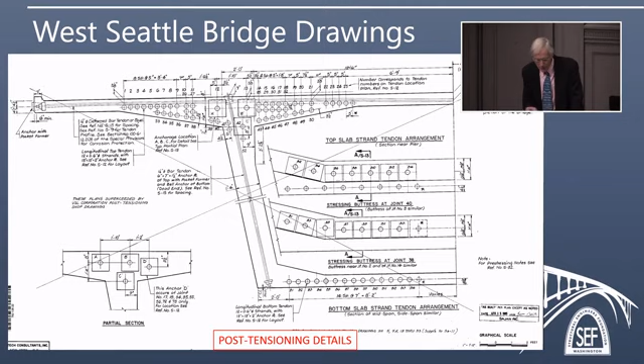So that's how you build it.

What's happening now? Well, where the bottom cables end, there is an anchor point, circled in red there. And if you look at the bottom of the bridge, you see some cracks emanating diagonally, and they happen to start exactly where the anchor for those bottom cables ends.

What has happened is that the forces from that anchorage are very large, and some of the other forces in the bridge have moved around a little bit thanks to creep in the concrete. The result is that there are cracks which emanate from that bottom anchor point.

And that is what is causing all of the problems today. So, in fact, but for a very small change in the original design, we would not be having any of these problems. The rest of the bridge is, in fact, in remarkably good shape, considering it's 37 years old.

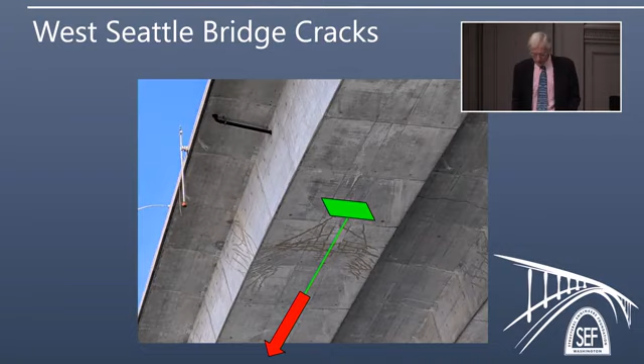So, I think the last question is, where do we go from here? What is the future of bridge engineering, and where are we going to go with it?

Well, I think the first thing I would say is Washington State will continue to lead the way in innovation. If you look back at history, we can boast the first-ever floating bridges, and at the time they were the only floating bridges in the US. Thank you, Homer Hadley.

We can boast the first pre-stressed concrete production plant in the whole country. Thank you, Art Anderson and Brother Tom.

We can boast the longest steel cantilever truss bridge. This is the one over the Astoria Bridge over the Columbia River. It's the longest in the US, and it's still true today.

We can boast the first cable-stayed bridge. Thank you, Arvid Grant, for bringing it to this country, the first one in the US.

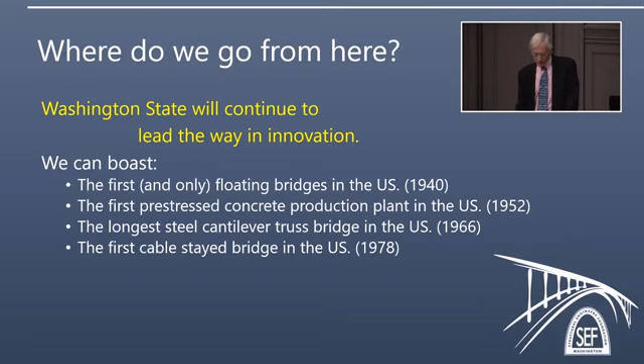We built a major suspension bridge, which is pretty rare these days, and that is the second Tacoma Narrows bridge.

About a month ago, we just built the longest pre-stressed concrete girder ever built in the world. Thank you, Concrete Technology Corporation. It's now over I-5 just outside Tacoma in a bridge there. So I think we've got a pretty good history of innovation, not just in the state, but in this country.

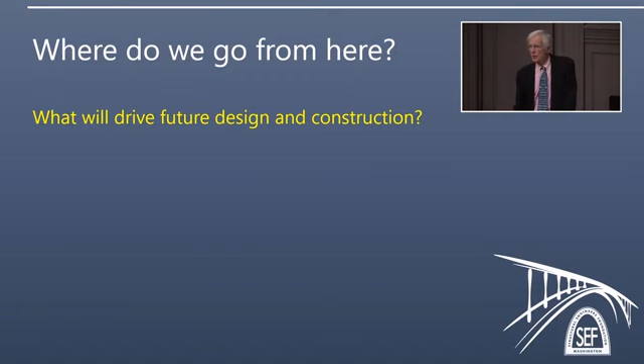Then you ask, well, what do we think is going to drive the future in terms of design and construction? What are the big forces acting on us? Well, I think anyone's crystal ball is probably as good as anyone else's.

But the ones I would say are things like congestion in urban areas getting worse and worse. The result is that it's very difficult to build a bridge over a highway and put a column down wherever you want to, in the middle, to make two short spans, because that column will probably block off traffic somewhere on the highway below. So what you then wind up doing is just building longer girders.

It also means we have to use what we call accelerated bridge construction, which are techniques whereby you can try to reduce the amount of time you spend on site, perhaps at the expense of a bit more preparation time up front, because that reduced site time will then help with the traffic congestion.

Sensitive environmental areas we are much more sensitive to today, and again, these typically do the same kind of thing. You build bigger, longer bridges so you can jump over a sensitive area rather than having to put a column down there. There's also the need for longer service life.

Corrosion has always been a problem, and this will continue to be a problem. We're always looking for ways to slow it down.

What tools do we have for innovation? Well, we've got new materials. We're always trying to make materials which are stronger, which are lighter, maybe more corrosion resistant. Things like carbon fiber were incredibly expensive only 20 years ago. The price has come down, and it's being much more widely used now. Very, very strong stuff.

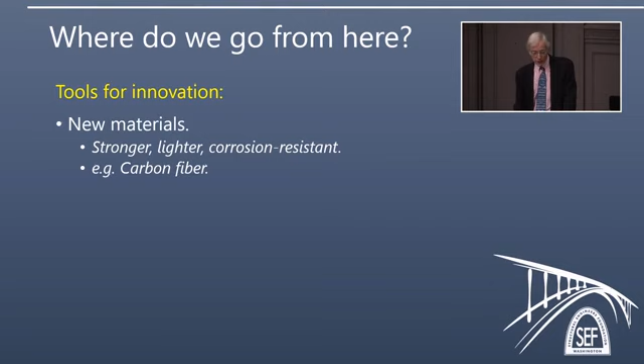New methods of construction include things called SPMTs, which we'll see in just a second, lateral slides, which we'll also see, and bridge launching. And then I think we should add in computer technology, which is allowing designers huge extra openings in that they can deal with difficult geometries, never possible before, difficult stress conditions, earthquake conditions—it's made a huge difference to what we can do.

A very quick look through then. This is an SPMT, and you can think of it as the world's biggest forklift, if you like, because it's called a self-propelled modular transporter. You can see this thing has about 20 axles on this side, and there's another one on the other end, and it's carrying what looks like a huge concrete platform, which is in fact a whole bridge.

And the way you build a bridge fast with these things is you find a field close to where you want to put the bridge, and you build the bridge in the field. You're disturbing no people, just cows. You then go in with the SPMT, you pick it up from the field, and you go down the highway. You drive to the final location, set the bridge down, and then you go home.

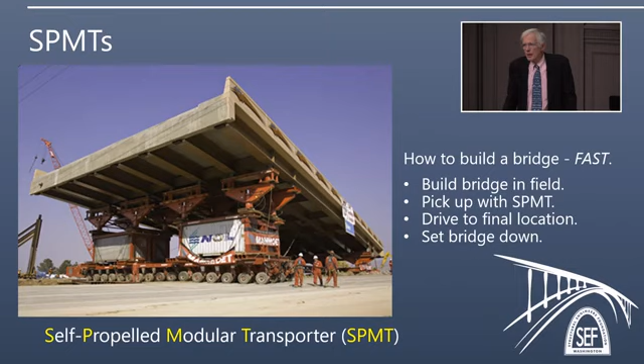And the state of Utah has made extensive use of these things, and they've been able to replace a bridge over the freeway there in a weekend. They closed the freeway for a weekend, put the new bridge in, and then go away. The first time they did this, something like 10,000 people came out to watch, just because it was such a spectacle to see this happening.

to be closed. And the person who won this was a company called Max Kuney Construction, and they sat down and worked out that the cost of closing I-5 was a huge part of the total cost. So they worked out a way to close I-5 for the very minimum possible time. And I think I'm right in saying that they closed I-5 for a total of 13 hours, just overnight. And they got the old bridge out and the new bridge in that time.